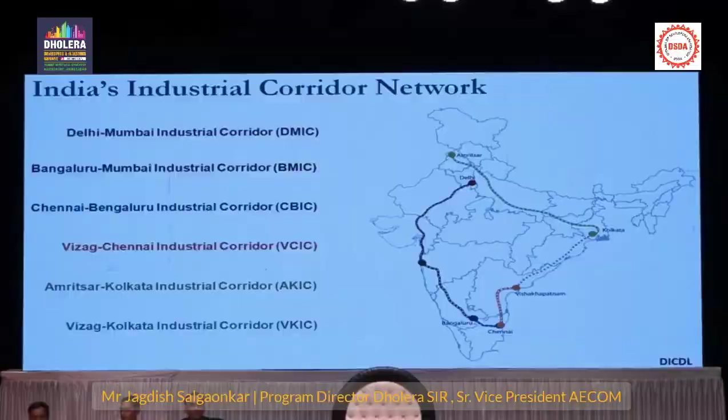Now I don't know how many of you know, but there are 5 different corridors planned in India. The main purpose of creating these corridors is to increase the manufacturing GDP of India. Today India's GDP has only 15% manufacturing. How to bring that from 15% to 25% falls under the Department of Commerce. So the Department of Commerce created these 5 industrial corridors, and among them the Delhi-Mumbai Industrial Corridor was the first corridor started, in 2009-10. After that, in the last 2-3 years, all the remaining corridors were started, and all these corridors are managed by NICDIT, the National Industrial Corridor Development and Implementation Trust.

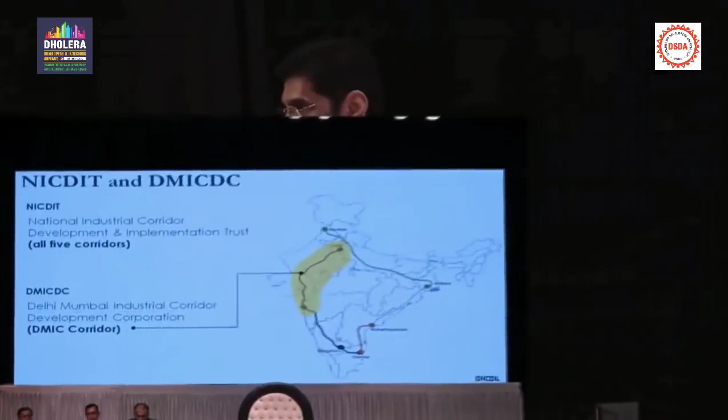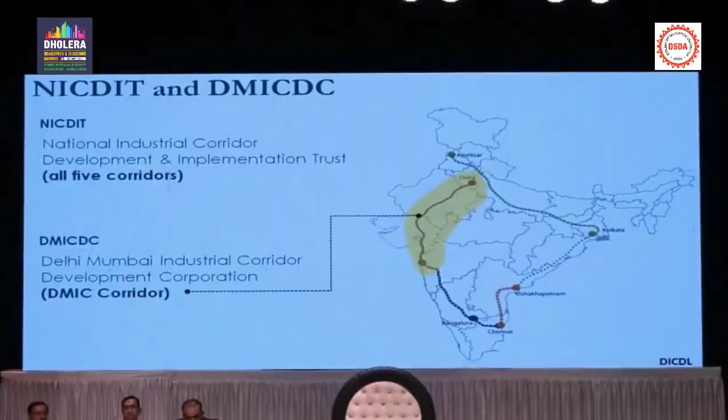So now you know the difference between where Dholera is as a greenfield smart city and where the other smart city programs are. They have no connection, the funding mechanism is different, and the management is completely different. But they are routinely mixed up - one is called the other, and people call me the smart city Dholera, thinking I'm part of the brownfield smart city.

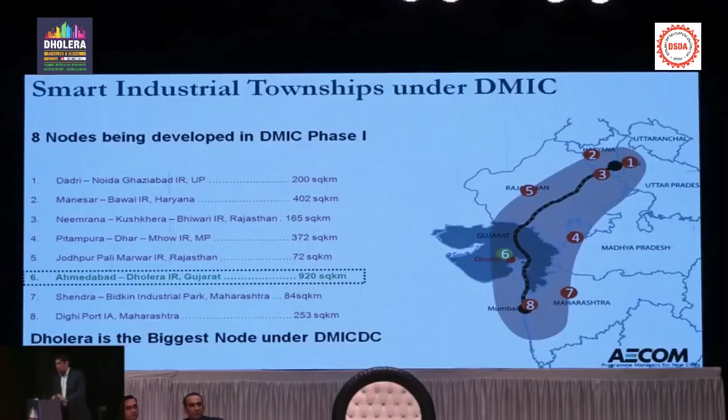On this Delhi-Mumbai Industrial Corridor, there are 8 different nodes, as they call it - industrial areas that are planned. You can see number 6 is Dholera, and this is the largest node on this Delhi-Mumbai Industrial Corridor. So Dholera is the largest, and it is also the node that has come farthest along in terms of construction.

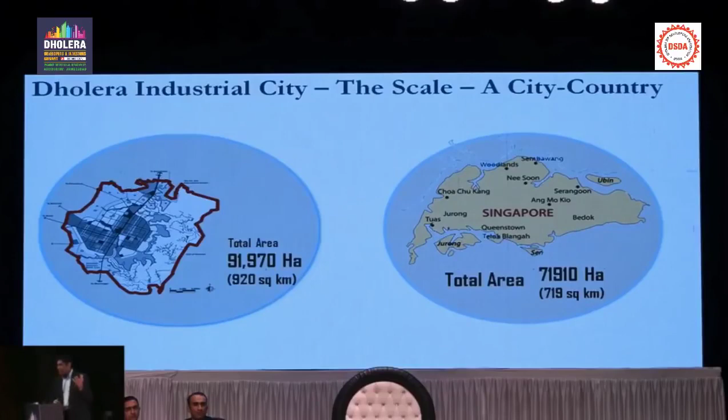So how big is Dholera? Dholera is 920 square kilometers, but if you compare that to some countries like Singapore, it is even bigger than Singapore. We are almost building a country like Singapore - Singapore is 71,900 hectares and Dholera is 91,000 hectares, so it's almost 20% bigger than the country of Singapore. So now you can imagine why it takes time, and I will explain that too.

But when it's completed, after everything is done, 30 years later, the population estimate for Dholera is 2 million people - 20 lakh people will live there, and approximately 800,000, 8 lakh jobs - new jobs will be created. These jobs will increase our manufacturing GDP. These are all new industries under the Make in India program, which is what's going to create the economy for India.

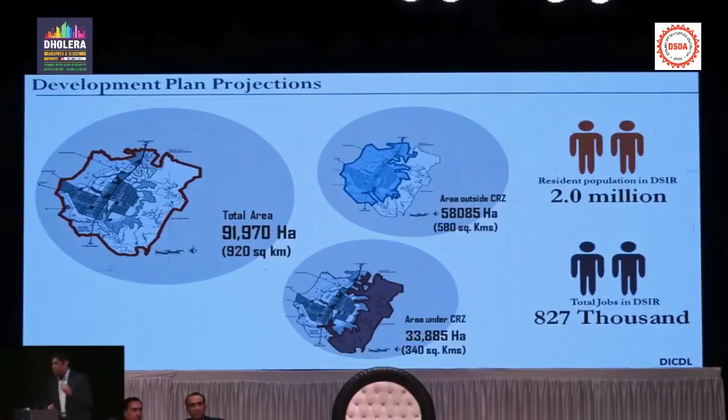I have been working on this project since 2013, and a very common question that comes to me is, why does it take so long to build a city? So I wanted to show you the timeline as to why it takes so long.

In 2009, we enacted the SIR Act. But once the SIR Act is enacted, several things have to happen before you start building a city. You have to create a development plan, which takes some time, and then it has to be approved. To get a sanctioned development plan takes anywhere from 3 to 5 years, because it is a formal, official document of the government of Gujarat. It has a public review process, a public comment timeline, and it takes that long.

You cannot rush it. It is like saying, deliver me a baby in 3 months. The baby will take 9 months, give or take 15 days, maybe a month. So the development plan will always take 3 to 5 years because it is a time-consuming process.

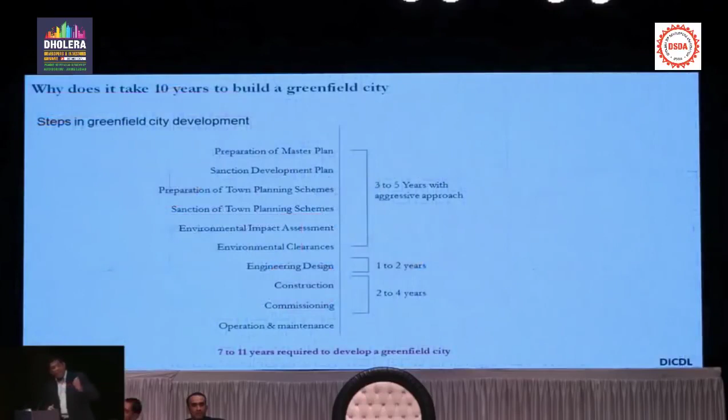After the development plan, we have to do the design. After the design, then we have to do the construction. So you can see, by the time we go through the entire process, we are anywhere between 7 to 11 years.

Now Dholera, as it was advertised, Modi ji first announced it in 2009 I believe, that this city will come, it will be very big, it will be like Singapore, and everybody was saying, how much delay is happening, how late it is becoming, you cannot build a city. But now you can see why it takes time. There is no way, maybe we could have expedited it by a year or so, but some of these things take time - development plan, design, construction.

So these all take time, and it takes 7 to 11 years to build it.

I also want to put in perspective Songdo in South Korea, which was the latest brand new city like Dholera that's being built, started in year 2000. And today, in 2017, it is only 50% built, and it is only 8 square kilometers. We are 22 square kilometers starting with, going up to 900, and Songdo is only 8 square kilometers, and it is taking them 15 years.

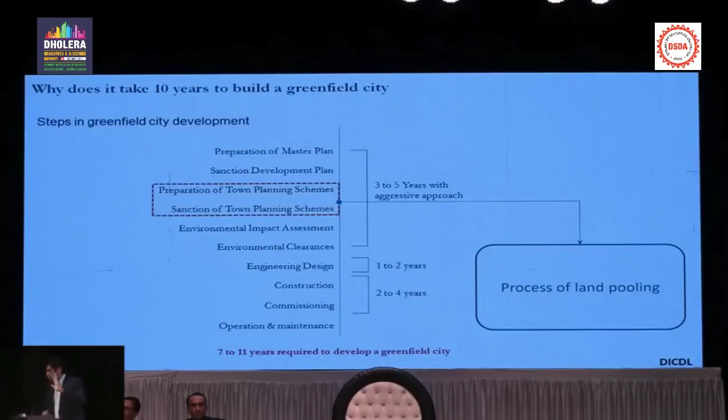So we are not behind in terms of benchmarking in the world. We are doing a great job. I want you all to know that the state of Gujarat, the Gujarat bureaucracy, and the engineers are all doing a fantastic job. So don't worry, this will happen, and I will show you how this will happen.

So how do we start constructing a big country like Singapore or a big city like Dholera? You cannot do 920 square kilometers at once. So as you know, we have town planning schemes.

So we broke the town planning schemes into 3 phases. Phase 1 is TP 1 and 2. Phase 2 is TP 2 or 3 and 4. And then TP 5 and 6 is phase 3. And you can see on the right-hand side, we have given you the approximate timelines. Phase 1 is up to 2022, and we are doing the construction.

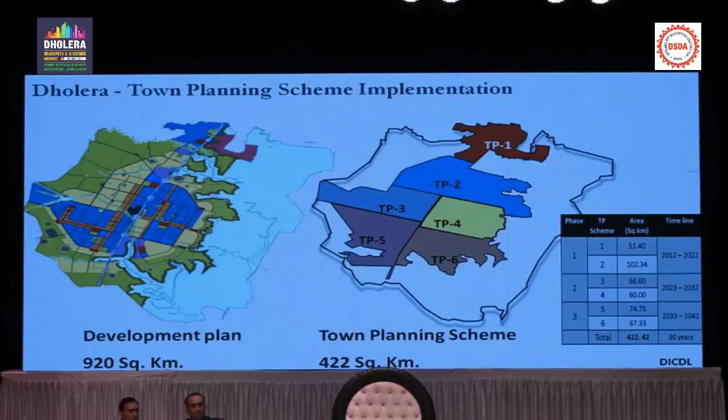After that, phase 2 or phase 3 will start. But within phase 1, if you look at phase 1, it is 153 square kilometers, which is TP1 and TP2.

We started construction work on this in 2013-14. But we soon found out that the cost of building trunk infrastructure - those of you who are in construction will appreciate this - for 153 square kilometers is close to 40,000 crore.

Now who will give us this 40,000 crore investment? Because there is no private investor that's going to come and build all the pipes - water, wastewater, power, gas - everything has to be built, right?

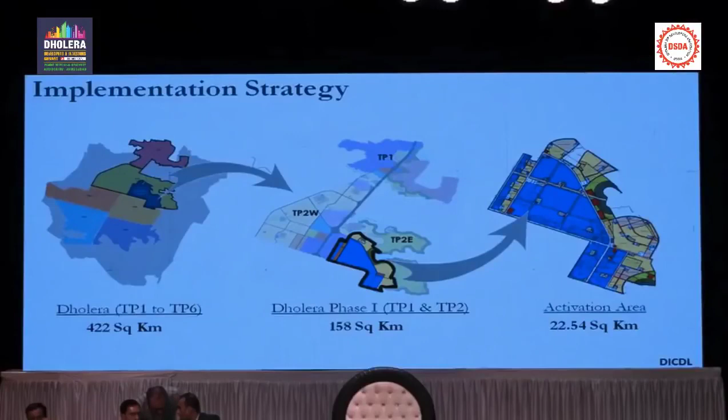When you go to Bombay, does it feel small to you? Okay, so this is not that small—22 square kilometers is a city in itself. Gandhinagar is about 40 square kilometers total, and its planning started in 1965, but even now it's not 50% complete. So new cities take time, and 22 square kilometers is not a bad size. It is a big size, but because of industrial production, it is going to grow very fast once companies start relocating. So within this 22 square kilometers, here is the breakdown.

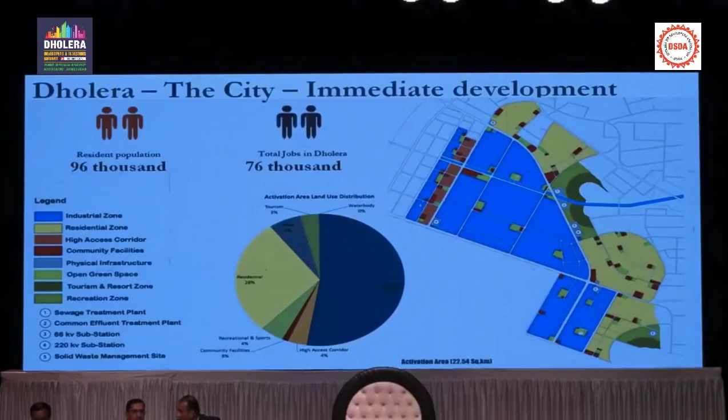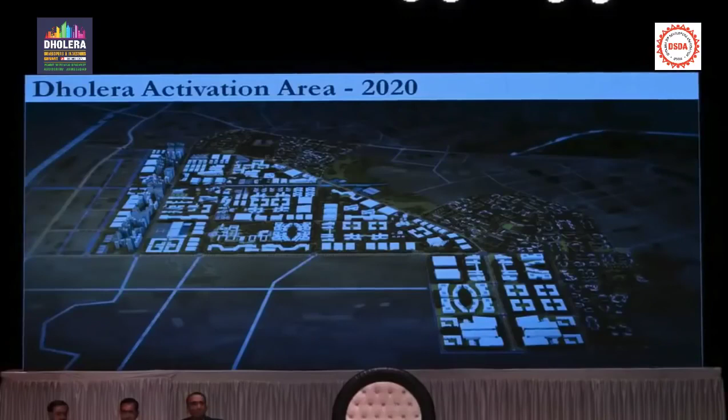So this is our footprint, 22 square kilometers. And this footprint of Dholera is going to be managed by DICDL.

DICDL is a special purpose investment vehicle, an SPV, formed between DMIC-DC and the state government of Gujarat. This is a special partnership, a 51-49% partnership, in which DMIC has put in 3,000 crores cash and the Government of Gujarat has given 3,000 crores worth of land. So our corpus became 6,000 crores.

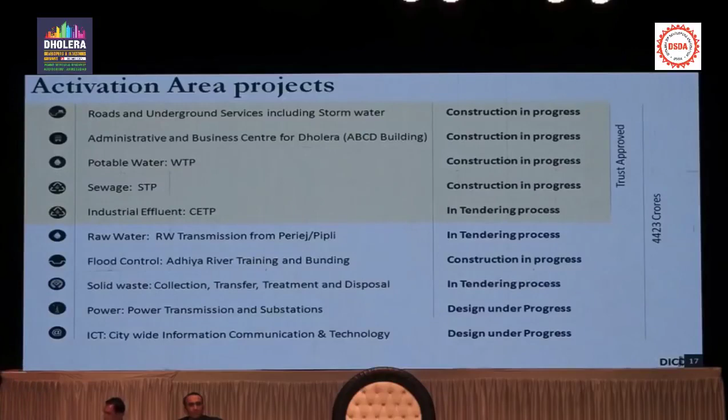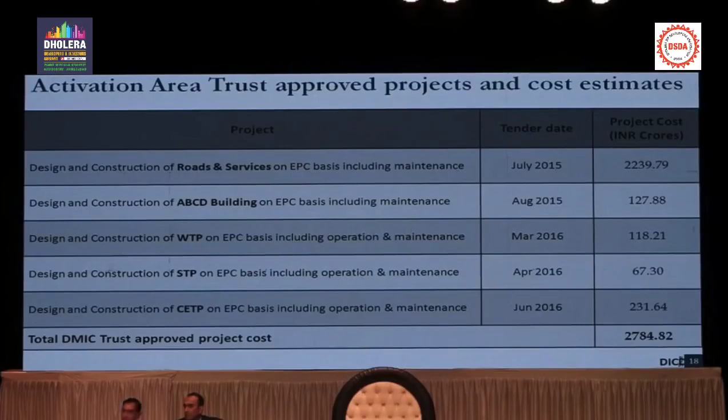Now I want to get a little bit into connectivity, because the second most frequently asked question to me is: your Dholera is located so far away, 100 kilometers, where will people go, how will they go there, who will go settle there? So I want to remind everyone that there are many places in the world where you start a new city that's 50, 60, 80, 100 kilometers away, but very soon, over 10, 20 years, it merges into the nearest main city.

In our case, we are hoping that Ahmedabad will be that nearest main city because it's a more vibrant, bigger community. And we are also introducing this concept of twin city, where Dholera and Ahmedabad will become almost like a twin city concept. Maybe not now, but maybe in a few years, because the corridor between Ahmedabad and Dholera, we are right now building a 6-lane access controlled expressway.

That expressway is actually under design by National Highways Authority of India. It has already been funded. Land acquisition has started. We are also building a metro inside the expressway that will reduce the commuting time between Ahmedabad and Dholera to less than 45 minutes. When that happens, distance will no longer be an issue. It is going to become a twin city concept.

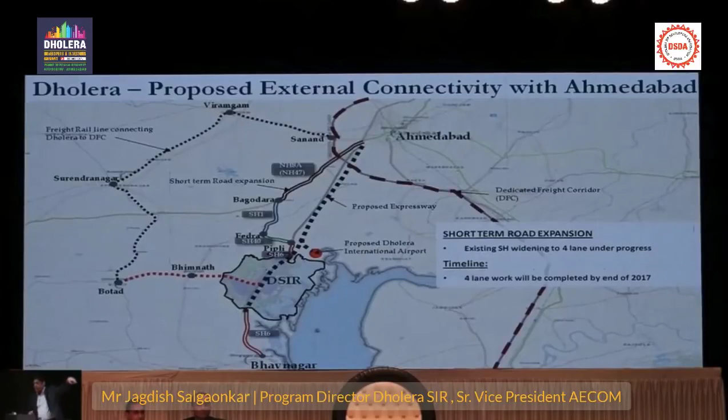I also wanted to point out the existing state highway, which I'm sure all of you have driven on, has noticed that it is being reinforced. The main reason for that is because the expressway will take about 4 years to build. We did not want to take any chance, so we are already strengthening the existing SH6 and SH140, and the lanes have been added for capacity. I'm sure those of you who drive down there have noticed that.

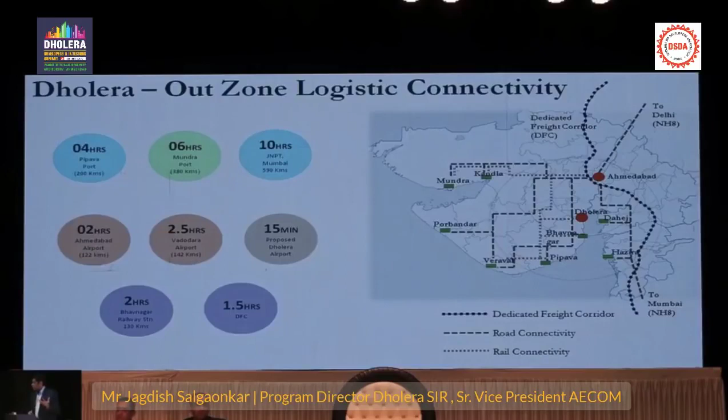Overall, from a connectivity standpoint, once you are near Dholera, it's extremely well connected to all the ports by road and rail. This is a slide we have created for our industrial clients to show that within a 6-hour drive, they can be in Mundra, or within a 2-hour drive, they can be in Bhavnagar, because our industrial clients mostly want to know how they can evacuate their manufacturing goods. So they have easy access to airports and ports, both by rail and by road.

Okay, so now let me switch gears a little bit and speak about smart cities. I'm sure the word smart cities has been so overly used that people are curious what a smart city actually means.

Can anyone give me a one-line definition of what smart city means to them? Does anyone have that? Okay, well, I'll give it a shot then. This is sort of my own definition, compiled from many different sources, but it's really our thinking of what we have come across.

A smart city is, the city itself is an inanimate object, it is just a dead thing. But what makes it smart is that we have installed systems, processes, and devices into the infrastructure so that the people, the businesses, can make smart decisions. So let me give you a few examples of smart decisions.

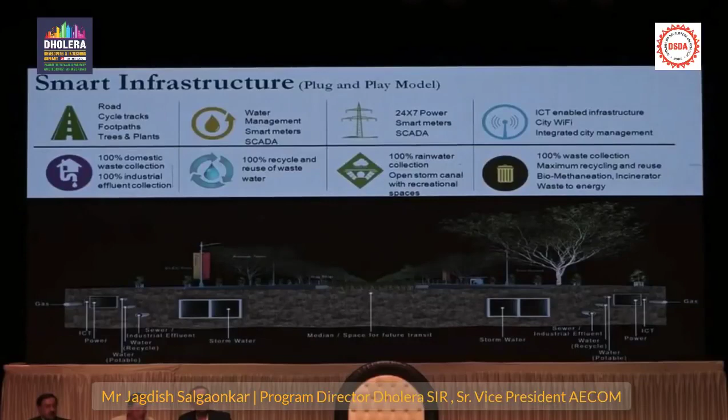So here's a snapshot of everything that we are building. This is a typical cross-section of our road, and there are two or three points I want to make here. Number one, first time in India, we are building all of the trunk infrastructure underground.

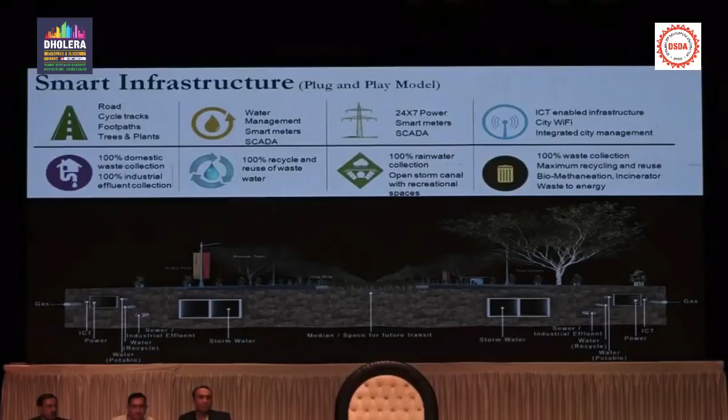Water, power, ICT, gas, wastewater recycle, everything is buried underground, even the power lines. I am sure you have gone to many cities, all of you.

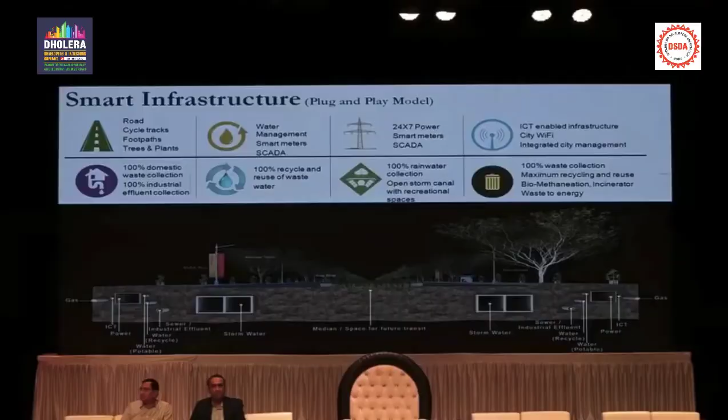So all this costs money. You don't get this kind of infrastructure in any industrial estate in India, in any city in India. That's why Dholera is world-class and the best.

So in terms of different infrastructure, I just want to give you the highlights of each component. In roads and services, for example, we are building almost 300 kilometers of lane kilometers of road, a total of 72 kilometers of road but multiple lanes, so we call it 300 kilometer lanes of road.

Completely traffic integrated sensor system. Each traffic light is going to have cameras, speed limits, sensors. All that information about devices being smart will be transmitted back to you, so you can make the decision which road to take. That kind of information is going to be proactive, not reactive.

So we have dedicated cycle tracks. You can see how the cross sections are designed, and this is the overall roadmap.

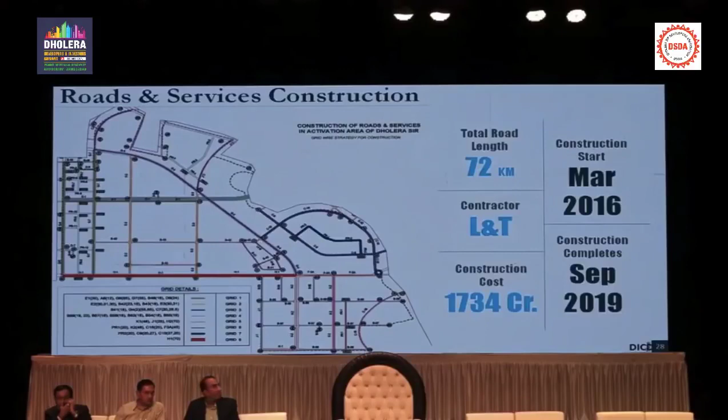It doesn't work on the screen, but G4, that line that comes from Dholera village, that is the road G4 right now that's being built. I'm sure anybody who has gone to Dholera right now can start seeing the city beginning to take some shape and form.

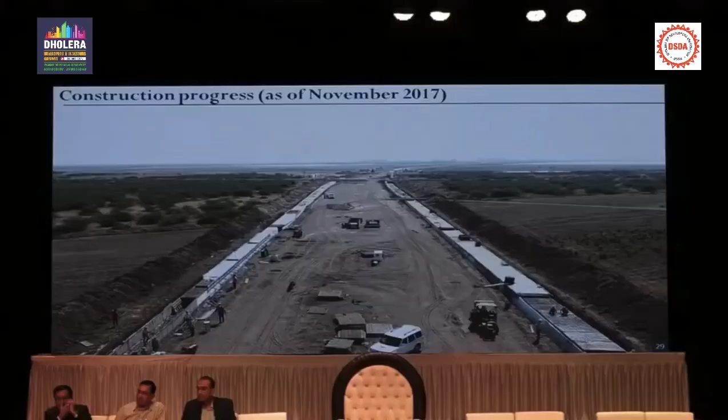So everything underground is built, slowly it has to come up. Most of you know that Dholera is a very difficult area for construction because the soil conditions retain a lot of moisture. You have to dry out the moisture, compact it correctly, so the roads will last for 30 or 50 years. So that's what we are doing, building these roads right now.

Power is going to be available in March 2019. Right now, we have invited private companies, both Torrent and Adani are applying for the license with GERC, and GETCO is building the transmission line. So both of those components will be ready by March 2019 at the latest, or even sooner.

Then in water, which is by far our smartest component because of the technology the way it is, we have quality meters, so you get the ultimate best quality of water.

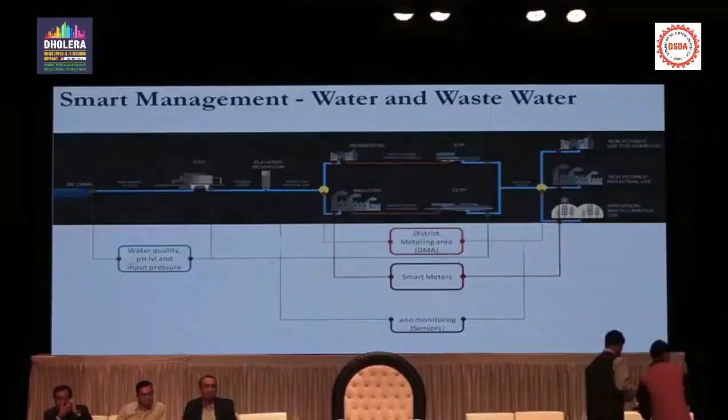We have district metering on water, and then we have smart meters as well as leak detection systems. This is another component which, to you as consumers, is going to save a lot of money.

Leak detection is a major problem in all the cities in India. For example, in Mumbai, about 34% of the water that's produced and paid for gets lost or stolen. In Ahmedabad, about 17 to 23%. And who pays for the lost water? The existing customers pay, right? Because it gets loaded onto your cost.

In Dholera, we will not waste more than 5% of water, and that is only because of evaporation, transpiration, and whatever is required to wash down the machinery. The rest of the water goes back into the system. That means higher efficiency, lower cost.

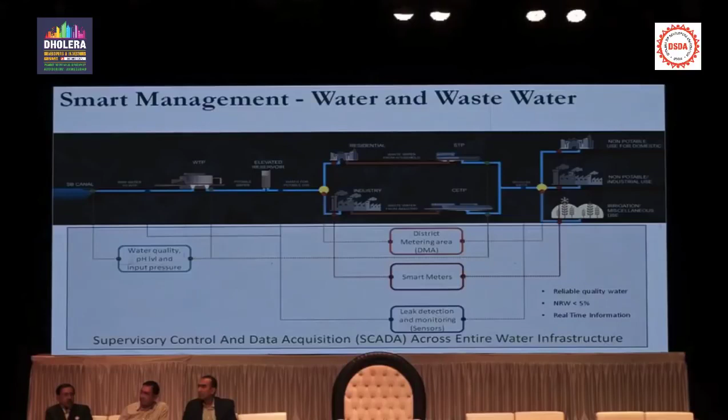All the points I'm making are that we are installing all these smart features not just to increase the cost, but because eventually the consumer is going to pay less in the long run. All we look at is life cycle cost savings. That's what we look at.

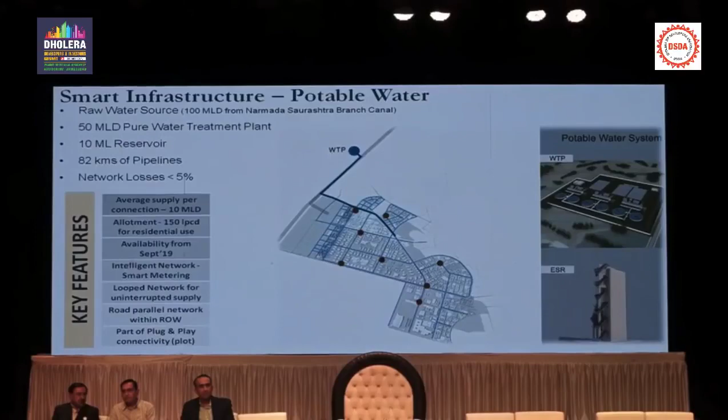In terms of potable water, we are bringing in 10 MLD of water immediately, and it will be ready by March 2019, or maybe June 2019. And again, everything is smart metering - I think it's the same system.

Recycled water - that's another unique aspect of Dholera - we have 100% recycling of wastewater. I think this is probably the first city in India doing 100% recycling. And all of this wastewater is going to be used for industrial water use.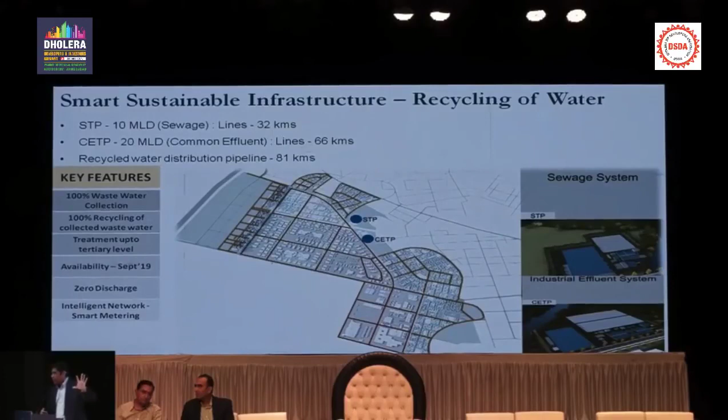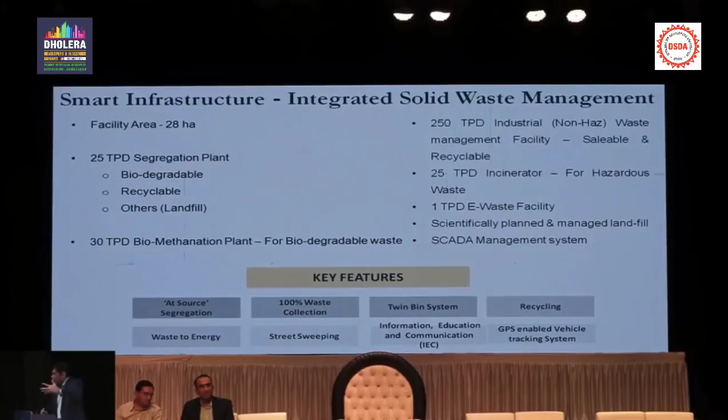In terms of solid waste, again, it's door-to-door collection. Everything will be collected in separate bins - 100% recycling, composting, biomethanation, gas production. So all of those things are planned. Although solid waste will take some time because as people come in, you generate garbage - you don't need it on day one. So maybe 2 or 3 years down the road, we will do that.

Okay, so that leaves us with the infrastructure components. Now let me get into the urban transit and livability aspects of Dholera. So far we have talked about businesses and infrastructure and utilities. So what this shows you is what we are planning from a transit standpoint for Dholera.

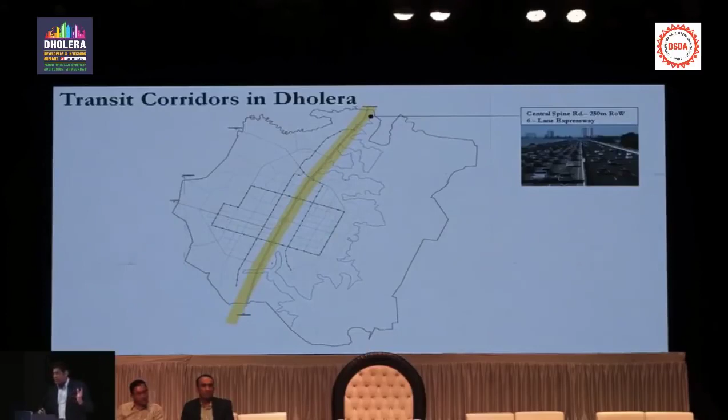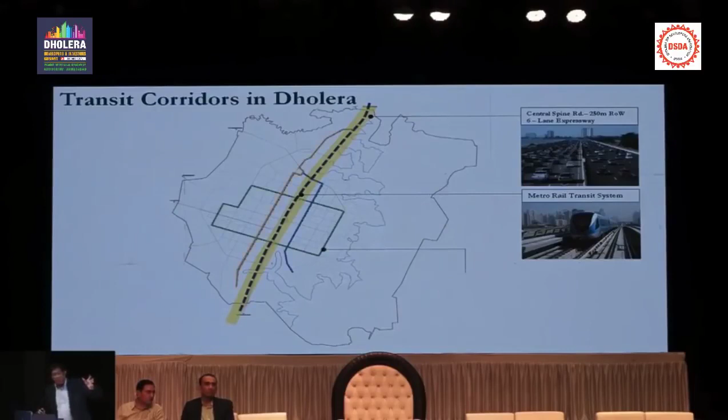Like I mentioned earlier, there is a metro within the expressway. The yellow line is the expressway, and there is a metro that's going to run from Ahmedabad to Dholera. It's currently on the JICA funding plan for 2019. Then there is a light rail system planned, shown by the green and blue lines.

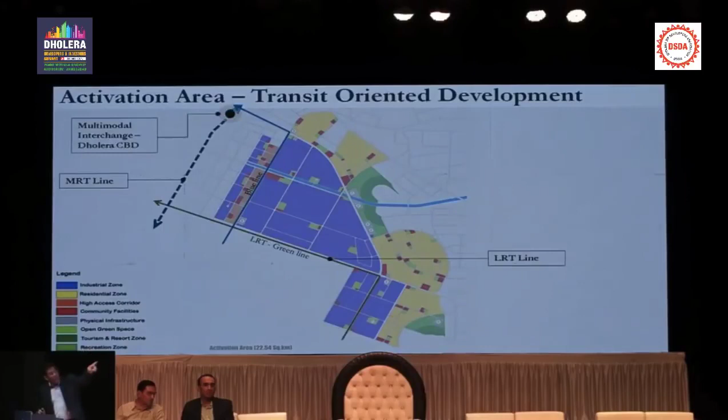And what I wanted to also show you was the transit-oriented development that we are planning, where the metro is coming on this line. You've got the green and blue light rails, and then you've got the bus terminal, and this orange patch that we show is our high access corridor. High access corridor is mixed use development, high FSI, and it's going to be like what they would call downtown - a transit-oriented development where you will have all kinds of businesses, commercial, and residential development going on in one place.

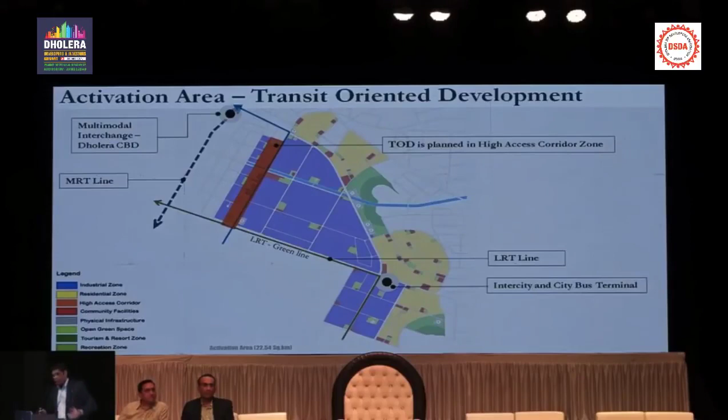People routinely confuse flooding and flooded area with inundation. That is a technical difference between the two terms. Inundation means when water has nowhere to go because the land is so flat that it has no ability to drain.

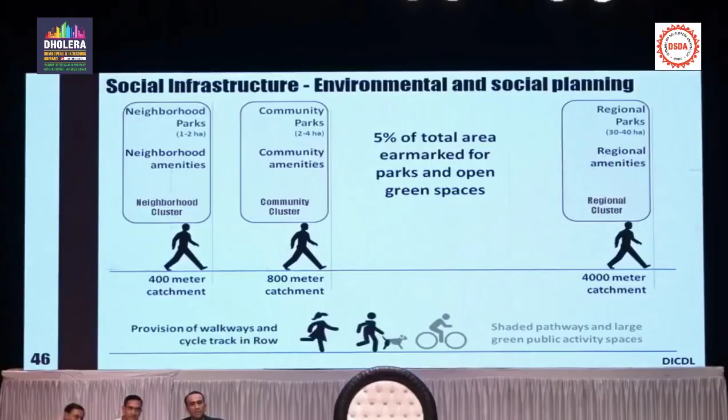So what are we providing in each of these different parks? In a regional level park, for example, we have all these different facilities, and they are typically clustered around the park, so it will be easy for people to find out where those clusters are. You will have all these different amenities.

When you come to neighborhood and community levels, you can see in a neighborhood park there will be a primary school, nursery, and local markets. But in a community park, you may find integrated schools like a high school, an Anganwadi, and a community market. So there is a distinction between a short walk for smaller, quick-to-get areas, and a little further walk for some larger activities.

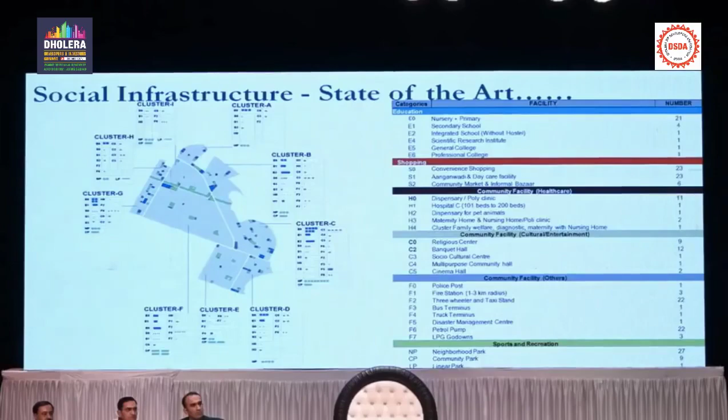So you can know exactly, if you are planning something in Dholera, where all the social facilities will be coming up. I talked about the canal earlier, and we see great opportunities in the canal, particularly for me, coming here to Dholera and designing a brand new city.

I always notice when I'm in India that it is the sense of civic sense, pride for our community, art and architecture. I don't know, for some reason, today's generation doesn't give it a lot of value.

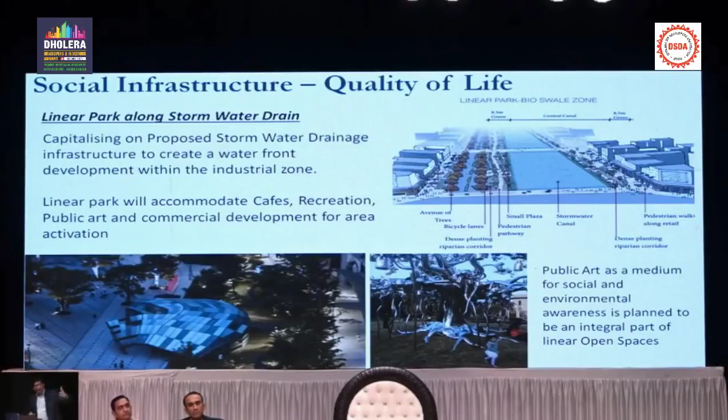So we are trying to bring that back through this whole canal feature, where we may have art and artistic expressions. We may create zones that will allow people to showcase their art and culture. We may create zones where we can demonstrate Swachh Bharat and some other national initiatives. So we are trying to create an environment where family is just as happy as businesses, where we have a lot of open spaces, a lot of parks with good kindergarten schools, good school education, good public hospitals, public facilities.

So all of these things are pre-planned. Now all that we need to do is get this tremendous audience interested and start building, right?

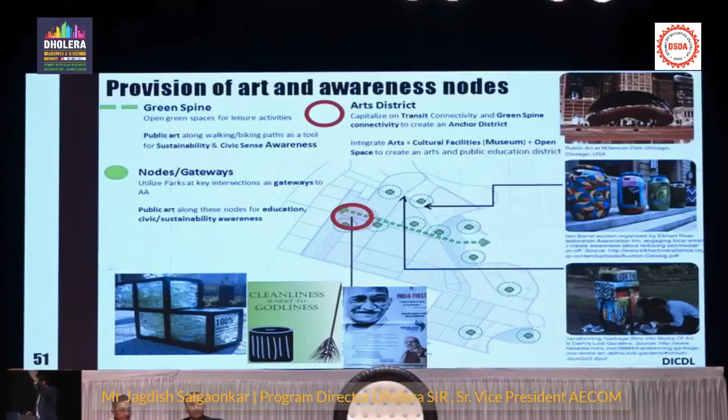Ahmedabad uses a miniature version of this now. They have a police command control center. Surat also has one. But for a citywide system, nobody has one yet. So Dholera will be the first one.

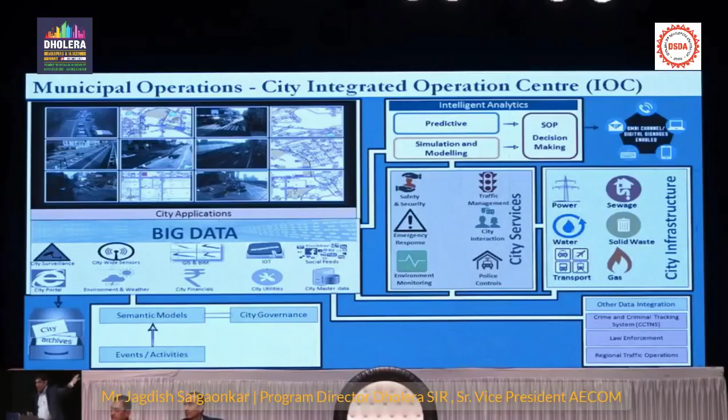And what I mentioned earlier, this whole cycle of gathering data, bringing the data into the control room, writing the computer algorithms and the analytics to give you the knowledge to make smart decisions is going to happen here. This is the brain of the city, which is going to reside in the SPV building. You saw the building earlier that's being built.

Smart governance is again a paperless form of government. Nobody, in today's day and age, should be required to walk to city hall or city offices to get a driver's license or pay your fees or bills. All of that will be online. You should be able to do it on mobile, you should be able to do it on your laptop. Everything will be online, and this is going to be built in.

This is already being done in many places throughout India, because this is the easiest place to convert a brownfield city into a smart city. So a lot of brownfield cities are already doing this. But for us, it's a way of life in Dholera. It's going to be part of our...

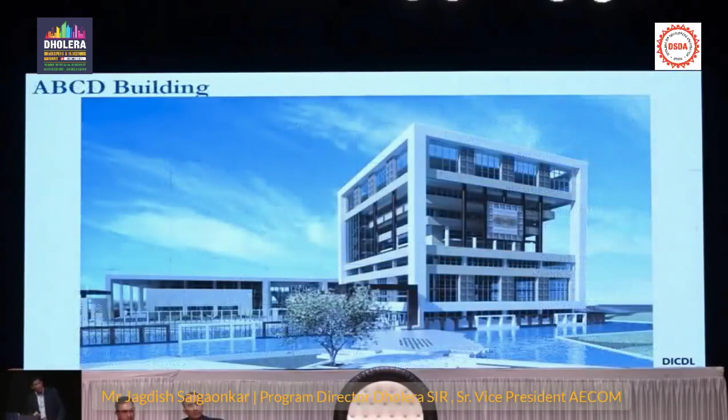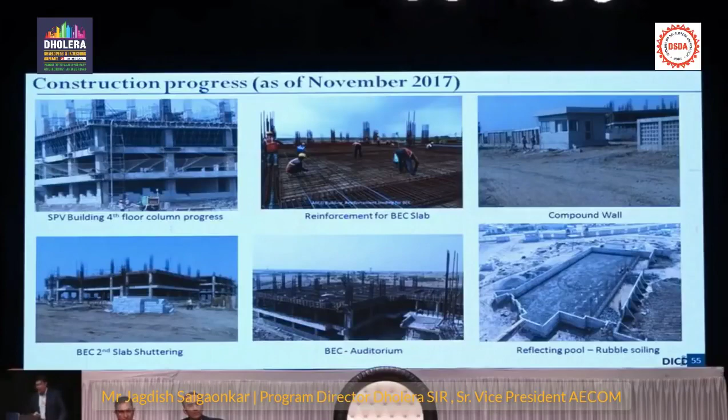And this is the ABCD building. I mentioned this is the construction that's already going on. You can see some of the pictures there. I think the video that was shown earlier was a fantastic video that showed you some insights on the construction that was going on.

So probably of most interest to all of you is, what are we selling, when are we selling, and for how much are we selling? So you can all do your businesses, and I see a lot of crorepattis here in the next few years.

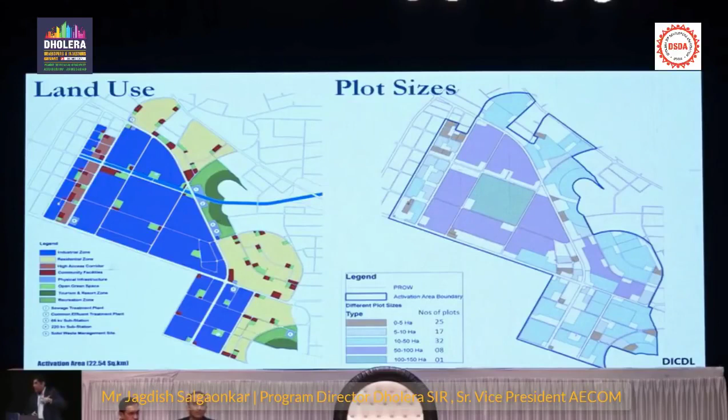This is all of the zoning that I mentioned earlier. Blue is industrial. The same thing you can see on the right-hand side is all of the plot sizes. So we have 0 to 5 hectare, 25 plots, 5 to 10 hectares, 17 plots. Now those plots, these are plots owned by the government. There are many, many private players in the activation area. We have not listed their plot sizes yet. This is only what government is selling right now. This is what we are targeting our audience, which is the industrial clients that we are selling to.

We are also advertising heavily for selling our land. We have made a commitment that of the initial 5,600 hectares, we will give allotment in 17 days and possession in 90 days. This is by far the fastest commitment we have made. This is our commitment to efficiency and transparency, and our complete land allotment system is online.

Anyone here can go online right now, that's the address right there. You can select the plot, click on it, and it will give you information on the plot, the dimensions, the setback, and you can make an application online. That application goes to our general manager, Dilip Brahmbhatt, who's sitting right here. He then processes it and puts it up to the MD for approval.

There is a land allocation committee that votes based on the businesses. If the industry falls into one of many categories that we really want, which is the mega investment category, and there are several formulas for that, we offer several incentives and discounts. So a lot of industries are right now talking to us, and they are all looking at it. As soon as we get a little bit above ground, in the next 3 to 6 months, we should have some idea of who our anchor tenants are going to be.